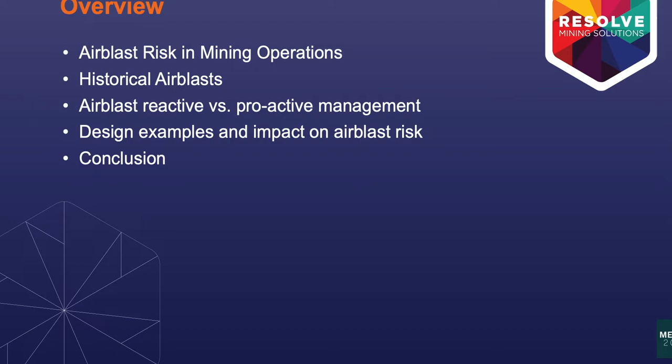So firstly, I'm going to talk about air blast risk in mining operations, why we worry about it, some of the things that have happened in the past. Again, there's a couple of incidents in there that some people may be familiar with, some people might have been involved with, so just keep that in mind. Then I'll be talking a bit about reactive versus proactive management, and then talking about some design examples and how we can improve designs and what impact that's going to have for your operation down the track.

I'm of the opinion that air blasts, wind blasts, air rushes, whatever you want to call them, they're mining hazards in all underground mining operations. Not just cave mines, which is initially my background. Here in New South Wales, we got 2 design guidelines. I know they're getting updated at the moment, but they are defining an air blast as a rapid displacement of large quantities of air, often under pressure in a constrained underground environment. Now, every underground environment is constrained, and so as a result, we're going to have an air blast risk in any underground operation.

From a risk point of view, any operation that has unsupported ground, it should be treated as a principal hazard. As long as you don't have any support in that ground, you're going to have potentially an issue with air blasts. So obviously in sublevel and block caves, as we progress to caves, it is a principal hazard, and that's where it mostly gets managed.

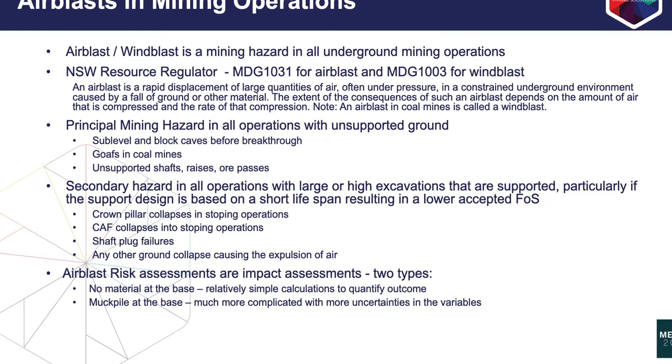So as it says in that definition from the regulator, fall of ground. Now, we generally treat ground and strata failure as a principal hazard, but quite often we're trying to prevent that, but we don't necessarily always look at the consequence. If we do get a ground and strata failure, what happens after? So putting some mitigating controls in and determining the air blast risk of that.

Now, I'm going through a couple of examples here. The first one is fairly old, from 1895, and I actually pulled that off that disaster timeline from the regulator. And I find it really interesting when I read that. So back then, there was an area in the Broken Hill silver mine that they had issues with ground, and on that particular day, the shift boss was saying, I'm not sure about what's happening here, I think we might have a potential fall of ground.

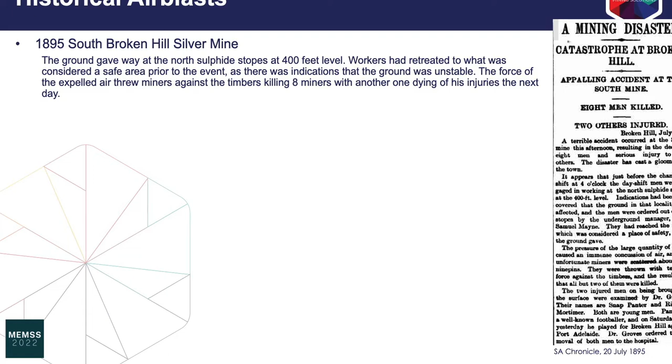So he identified the primary hazard of there might be a fall of ground, pulled all his people back, and failed to recognise the hazard of what happens when that ground falls. And as a result, 8 miners got killed that day, and a 9th miner died the day after in hospital. And the mine manager afterwards said he thought they had that mine so well timbered that they couldn't have any creep of ground. So again, the perception of what we're doing is safe to what potentially can happen. And that's a clip from the South Australian Chronicle from the time, which you can also find on the regulator website.

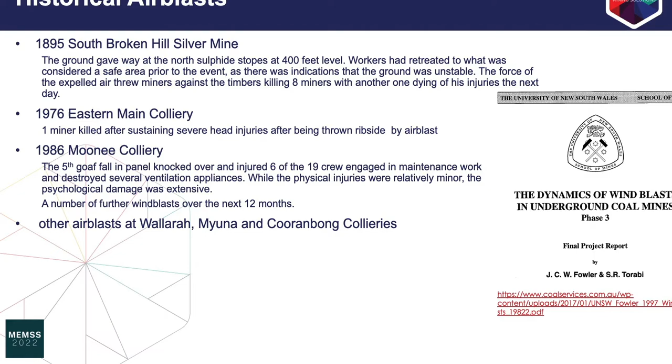The next ones are from the Newcastle coalfields. Those of you who work and have worked in those coalfields would know in the 70s and 80s there's been quite a lot of incidents of wind blasts, and as a result of that there was actually an ACARP project implemented that Dr. Fowler and Dr. Torabi from the University of New South Wales had a lot of involvement in.

There was another ACARP project that happened as a result of the Moura 4 incidents up in Queensland, which, even though inconclusive, a lot of people believe the initial air blast when the goaf collapsed actually then started an explosion that led to the explosion of the mine. And there was another one at Endeavour Colliery which was of similar incident. So in the coal industry, a lot of focus is on the explosions, but a lot of these explosions actually get triggered by a goaf fall that results in an air blast, stirs up coal dust, and then creates the conditions for a coal explosion.

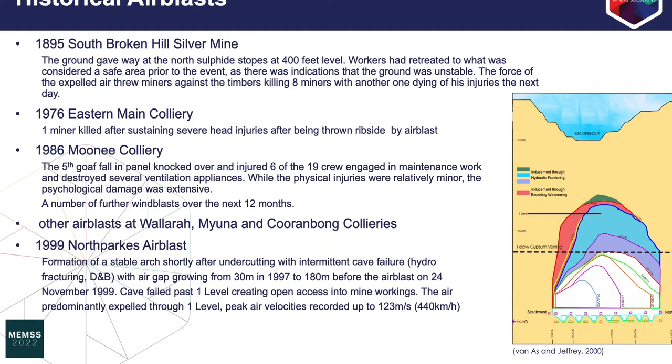And the last one there, obviously Northparkes. This is the one I first got involved in; I came across to Australia as a student in 2006, and I was quite amazed by it. You look at it, and hindsight is always 20/20, you sort of look at it and go, well, you've got this massive air gap, how could that happen? But then you look at the lead-up to it and how events took place. Again, it comes to this: things change over time, management of change, and identifying the risks that change as a result, and that's something we really need to have a look at.

So what usually happens when we do air blast assessments? Well, somewhere in the pre-feasibility and the feasibility study, someone starts doing a project risk assessment or anything like that, and air blasts get identified as a risk. In caving operations, in most other places not necessarily, and someone goes, yep, that starts being an issue once we start operating.

So we're going, well, that's undercutting, production startup. Same for a stoping operation: we start production, okay, we have some instability in that particular area. Someone needs to have a look at it at some point. All resources are constrained, so what do we do? Well, someone gets a task assigned with a 2-3 year lead time, do it before we start production. And as a result of that, well, shafts usually don't get identified at all.

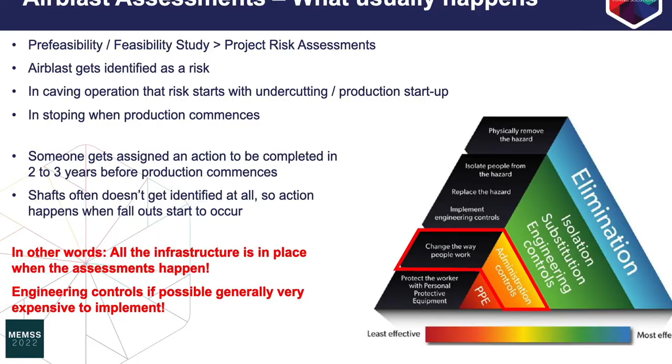And at that stage, if we do identify engineering controls, we go, that costs a lot of money, there was no budget. And so we either have to get out-of-budget money or we have to put in administrative controls. So, having stolen Anthony's slide, we're down in that really lower bottom of the safety triangle, trying to retrofit controls to risks we've already put in place.

So what should we be doing? Well, a lot of sites have technical guidelines in terms of how they do their mine designs. Instead of waiting for your project risk assessments, put air blast guidelines into your design guidelines for your engineers that do your planning and your mine designs, and make it part of your design process. As I go through the examples, you'll see that there are some very easy things you can put into the mine designs that dramatically lower your air blast risks.

Shaft stability assessments. Everyone does them, loves them. You drill a cover hole and then you get that report back and it says, yep, there are zones of weakness. Well, okay, so are we happy with the size of the zones of weakness, what it is? But if that shaft fails, what will actually happen? Like, what is the risk to the mine of a failure at that particular spot?

Startup of a sublevel cave. How big is the void? How big does the void have to be before we reach hydraulic radius? The hydraulic radius is where caving sustains itself, and until you reach that, you're basically creating a large stope, and you're leaving some material behind that acts as a blanket. The bigger the area you have to create before it caves itself, the larger that void is going to be, and the less of the material you're mining initially you should be extracting, because you need to leave the rest as a safety.

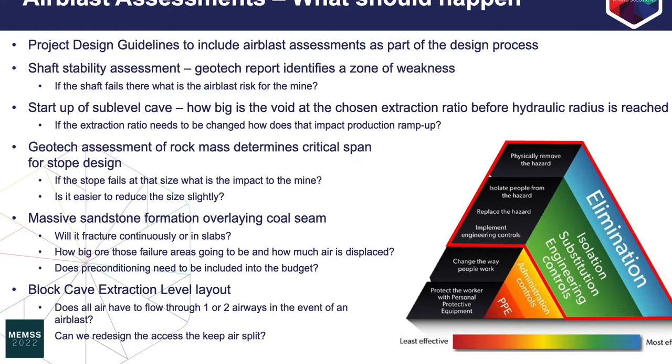For block caves, when the block cave fails, does the air all come out of one or two airways, or can I actually distribute the air around the mine? So what we're trying to do is get away from the administrative control and move up the safety triangle into substitution, engineering controls, and elimination, and you're trying to do it as part of the design. So in the end, it doesn't necessarily cost you much more, but you're achieving much better outcomes. So what's the risk?

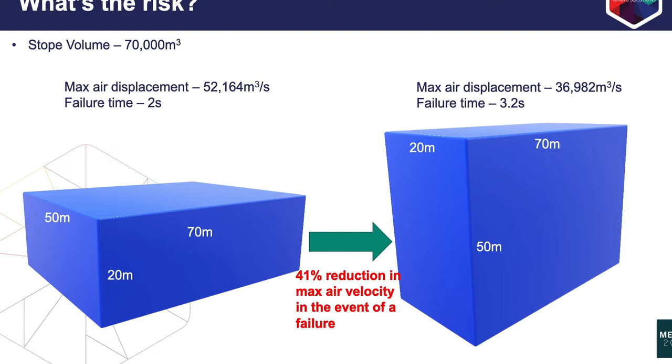There's two stopes, roughly. They're exactly the same volume, 70,000 cubic metres. Which one is safer? Left, right? Airblast and air expulsion from a stope is only a function of height. It doesn't matter what area you have that you're undercutting, you will expel based on height.

So if you have a coal seam that's only 5 metres high, all the air is going to come out in roughly a second. But a longwall is generally 200 metres long, and however deep your goaf is, so you're looking at a lot bigger area than a stope that's, say, 20 metres wide and 20 metres long. So from a risk point of view, you want higher excavations that have a smaller footprint. If you can do that, that helps a lot.

And no, I'm not saying redesign everything. It's just something to keep in mind when you are designing your infrastructure, your stopes and all of that: what is the potential outcome if you do have an issue. So you're looking at a 41% maximum reduction in air velocity coming out of the base of that stope just by having a different geometry. And that makes a big difference in your mine network, where the air needs to get dispelled from its source to the surface.

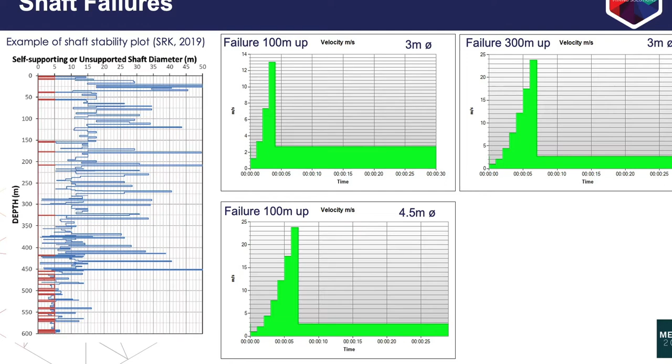So shaft failures, as an example, I was just talking about it before. You get a stability plot like that, which I've just pulled out of a paper. In this instance, you've got an area down the base that's fairly low stability, and you have a look at that and you're like, no, I don't know about that. Got a couple of areas further up. So what you can do is an assessment of the air blast risk.

You say, okay, if I have a failure 100 metres up, I'm doing a 3 metre shaft, and these two aren't linked, they're different models, so don't take it too much in context, it's just to show a point. Out of the base of the shaft, your maximum air velocity is about 13 metres a second. If I have a failure that's 300 metres up, same shaft, same everything, your maximum velocity out of the base has now gone up to 24 metres a second. So where your zones of weakness are has a dramatic impact on the outcome if that shaft fails.

And then you might go, well, what if we're doing a larger shaft and I only have issues down the base? Well, going from a 3 to a 4.5 metre shaft with a 100 metre high failure, you basically have the same air blast risk as a smaller shaft 300 metres up, because it's all about the height. Your volume comes out at the same time, so the larger that shaft is, if the failure height stays the same, the bigger your risk.

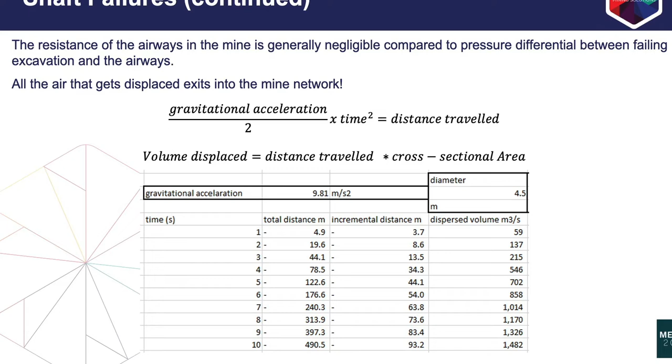Normally, when we do air blast assessments for the caving industry, we say we do not want to go above 20 metres a second of air velocity, because above that, you get projectiles that can cause a serious injury to your workers. And also the pressure waves associated with that can start causing quite significant injuries to lungs and similar. So some of those shafts, even though they're more localised because the total air volume is a lot less, can have a severe impact on your workers in the vicinities. So something to consider when you're doing shaft designs.

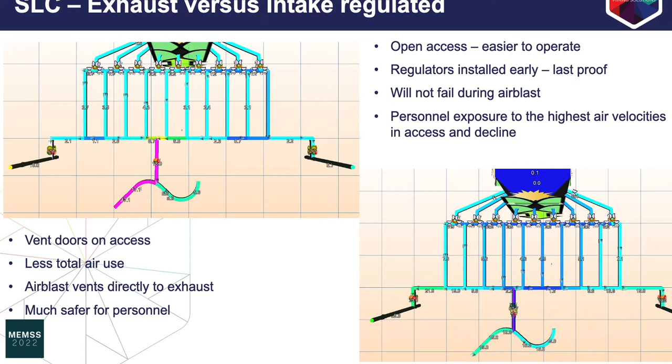So the tailings dam guys use a concept called personnel at risk, like they were talking about today as well. When you're looking at air blast risk, you want to look at your personnel at risk. How can you divert air into areas where there's less personnel? So in this instance, you're diverting the air blast into your exhaust system, which generally the only people going in there are vent officers, sometimes maintenance personnel, but it is generally a controlled area, so you can have a look at who's going in there, why are they going in there, how often are they going in there. Whereas if it's unregulated and you haven't really thought about it, you're putting all your production personnel at risk that are down in the mine for 12 hours a day.

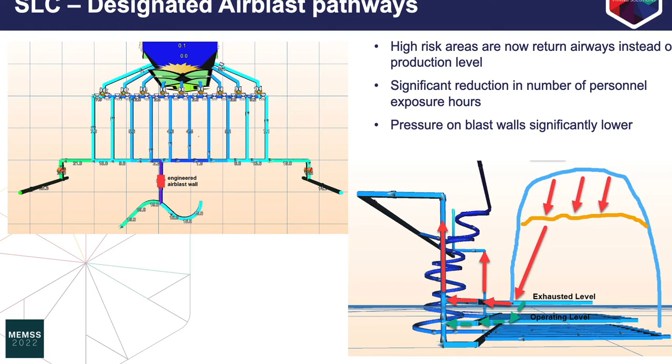The other thing we've done with SLCs is designated airblast paths. So as you mine out your top level, instead of closing it off completely, like a lot of times we might close these extraction drives and put plugs on them, in this instance, we actually close off your access to the levels, but leave it open to the exhaust. And that's what I just said about personnel at risk, removing the risk from your operators. Because now these guys on the level below where they're actually operating are much more protected from the air blast risk than they would be otherwise. Because if you close this off and you had an air blast, all the air has to go through that muck pile and come out where your operators are. So it's about diverting people away from the risk.

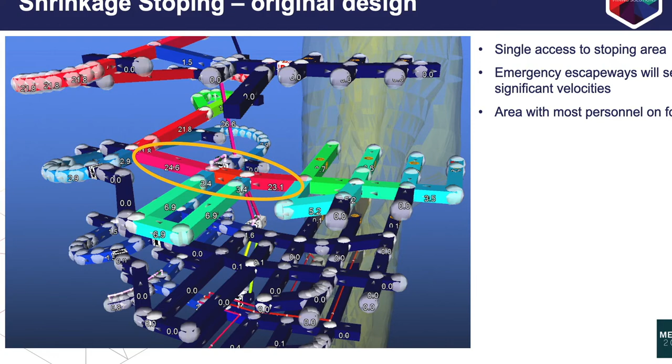Shrinkage stoping. Now, this mine had a few issues because it's a vent model, so it doesn't have an exhaust in here at all at this stage, because it was an operation that was actually open to the pit on the other side, but it's just to illustrate a problem.

So you're operating stopes in here, you've got a failure in your crown pillar, and all the air gets pushed out one way, and it's your only access into that level, where quite often there's no parking in here. People might park over here, they go in there on foot, and you're exposing people to a hazard. And again, most of the time it's probably fine.

It's when you have issues with your hanging wall and you're concerned about hanging wall failures, you probably should have a look at designs like this and figure out, well, is what we're doing actually okay?

The other thing that this one illustrates fairly well is your escapeways. Because they're one of the shortest connections to surface, they're actually one of the primary paths that air takes when you have a failure. It always tries to take the shortest route. In this instance, they actually have doors in front of those, so it's not quite as bad as it could be. But that's just something to keep in mind as well.

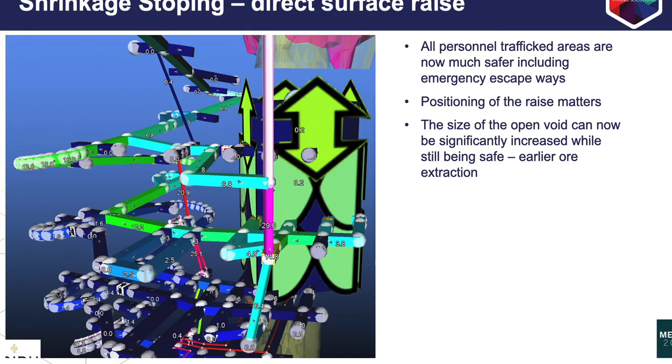So what do we do? Well, we put the exhaust into this area, and again, we're creating a designated path for the air straight to the exhaust, whether it goes straight to surface or just somewhere into a return airway. But if you look at the colours here, you now have a lot less risk where you've got your people and where your people move around.

The other thing with this one is, well, you look at the speeds there, and I was saying before 20 metres a second, well, this simulation assumed a certain extraction ratio. I now have a lot more leeway to go up with that, so I could potentially bring forward production from a higher level, which then has a positive impact on your plan.

And in most situations, you would have to put that raise in anyway. It's just by moving the raise, you're actually reducing the risk, which then means you can change your production plan to create a more positive outcome.

I'm actually getting through way too quick, but

So airblast risk assessments are all about understanding the outcome. It's not about determining the likelihood of failure. It's about: if you have an airblast, what does it look like? Where are the concerns in your mine? Where are the areas that we might be able to change something in the mine design to then reduce the risk that we have to address?

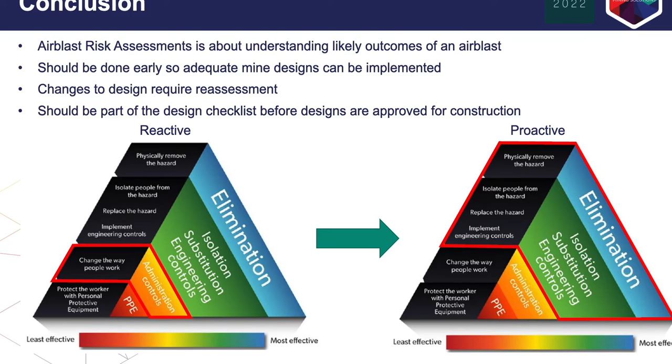It doesn't have to be an accurate assessment, but you will see where your areas of highest concern are. If they're in the return airways, you're probably all right, you don't have to worry about it. But if they're in your main travel ways, you want to have a closer look at what's actually happening.

So what we're trying to do is get away from the reactive model to the proactive model, and work in early to manage the risk before it becomes all about administrative controls and telling people you can't go there or you have to stay in your vehicles and all that sort of thing.

Now, I understand it's hard when you have brownfield sites, but when you have greenfield operations and projects, there's a lot of things you can do early, and that will help you.